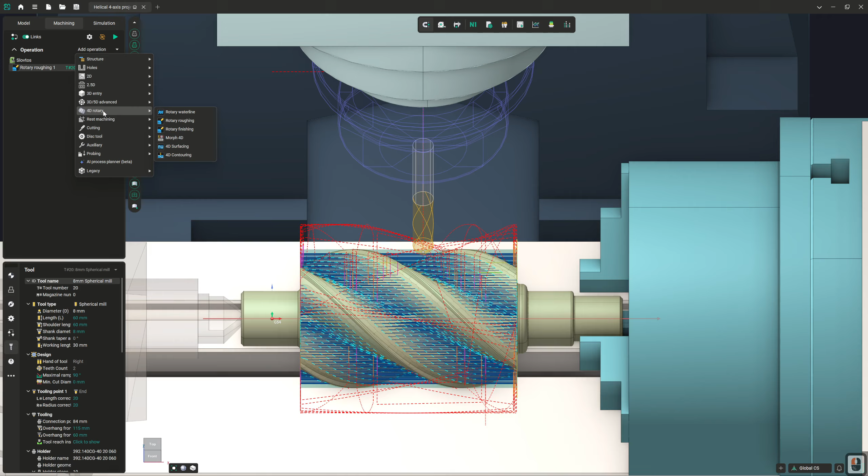So under add operation, under 4D rotary, let's take a look at 4D surfacing. And obviously the tool that we've got at the moment, as you can see from all of the tool marks from the roughing here, is a bit on the big side. So let's change that over now. And we're going to take a look at this 2mm spherical mill that's defined. And we can see here it's got a nice taper to it and everything, which serves our needs well.

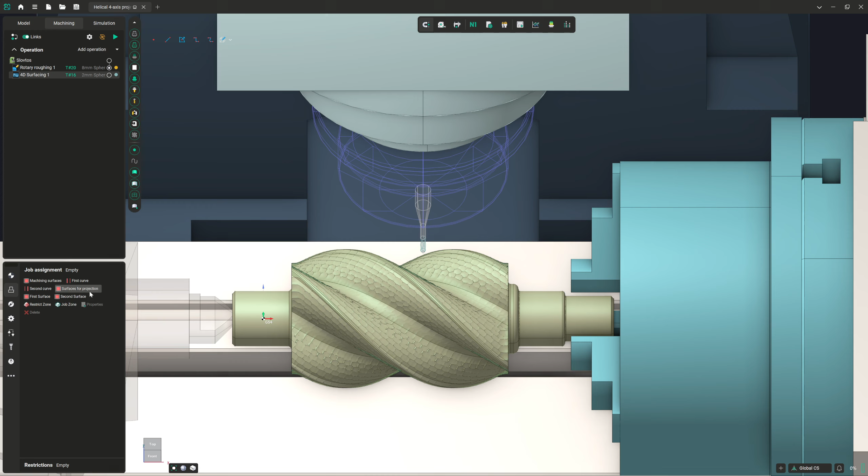And we need to define a couple of parameters for this operation. The first of which being, under job assignment, we want to define the first and then second curve and the machining surfaces. So starting with the curves, I'm going to grab the first curve, which we're going to go with the top of this vane here, and we'll set that as our first. And then for the second, we're going to go for the top of the next vane. So we're covering this entire surface in between them. Okay. So I'm going to set that now.

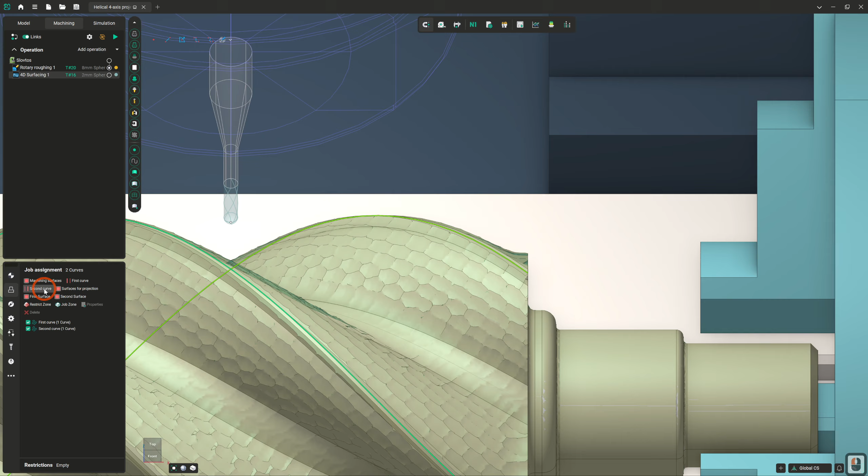And then finally, we're going to grab the surfaces like so. Let's get that last surface there. And we're going to define those as machining surfaces. Now, obviously that gives us 1/4 of this part quite readily selected and done. We can either select and grab each individual part, or we can go back into transformations as we have done in previous videos. So that's probably going to be our method. However, for now, I'd like to finish defining this.

So we'll take a look at the strategy tab now. And we've got a few options for the approach strategy. And parallel to vertical doesn't really match our needs. It's not quite the best direction for it. We've got some options here. So we can either go parallel to horizontal, parallel to vertical, parallel to 3D plane. Again, doesn't really suit this particular form very well. So I'm actually going to go for morph between two curves. And that is going to maintain the actual form of this curvature, but it's going to blend between the two.

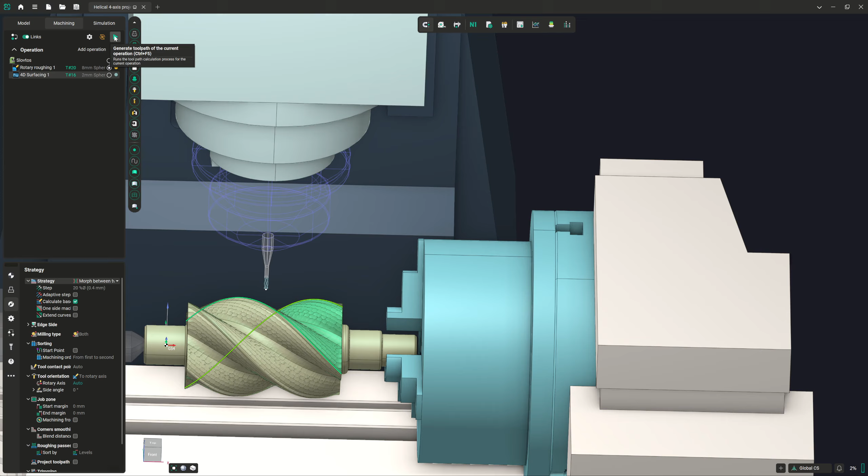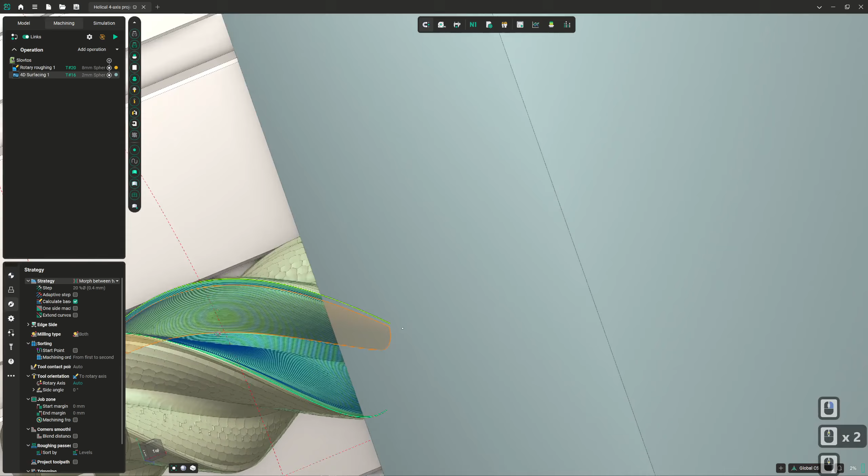However, since these curves are functionally rotations of each other with a slight offset, it means that it's going to maintain that same shape of sweep between each pass. So I'm going to click on Generate Toolpath now, and we'll be able to see, here we are, that same sweep gets repeated pretty much throughout. There's a little bit of modification as it reaches the end of these two curved surfaces. But generally, as I say, it stays pretty uniform throughout, which serves our needs rather nicely.

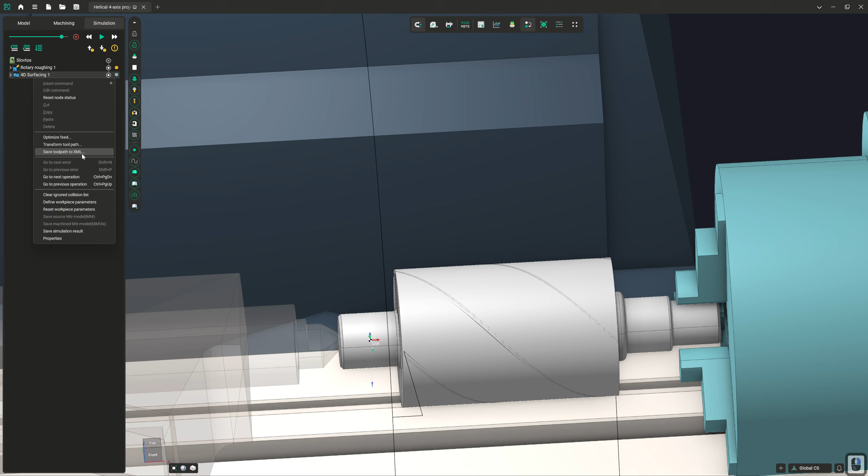So let's take a quick look at how this comes up in simulation, shall we? So we'll click on simulation now, and we are going to reset, and we're going to simulate up to current operation. Sorry, I managed to completely forget what I was doing there for a second. And we are going to run this, although a little bit slower than it was originally.

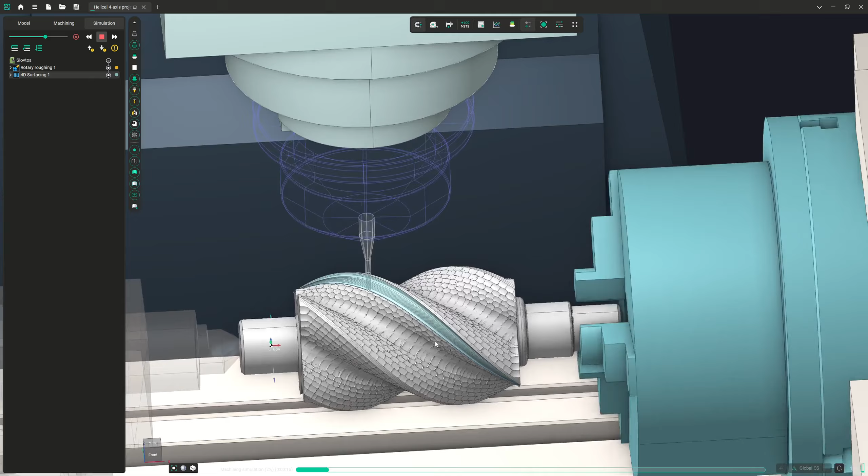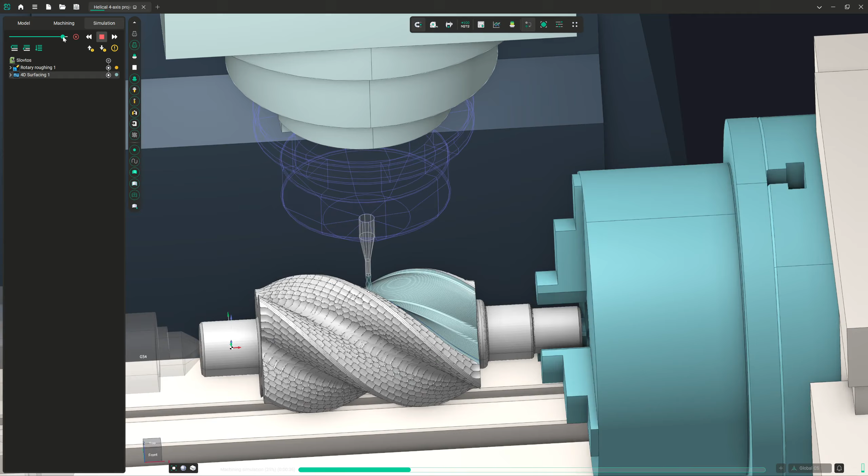And as we can see, this follows the helix of the part perfectly, which again gives us the best possible surface finish relative to the direction of motion in the part, and it's very much what we need this to do. So let's accelerate this a little bit, make sure it serves our purposes throughout the entire thing. We can watch it swing back and forth quite nicely there. Just going to speed past this a little bit. But as we can see, there's no nasty surprises. There's not even any particularly large bits that haven't been neatly machined away. So

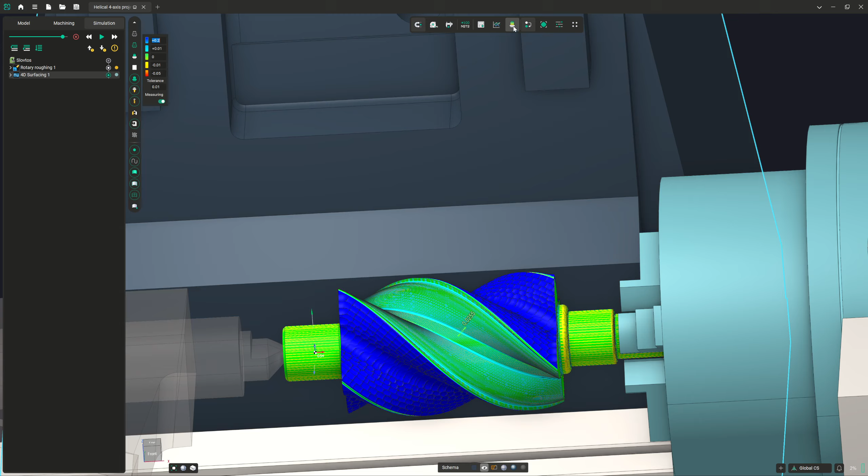let's have a quick look at verify compare. And as we can see, yeah, there's a tiny bit of light blue in there, but given that light blue is 10 microns difference, the obvious answer really would be to use a smaller tool or a tighter step over. But for the sake of this demonstration, I think it covers the purpose quite nicely. So I'm going to pull out the verify compare.

We're going to go back into machining, and I'm just going to snap the camera around again so it's a little bit neater. And we are going to take a look at copying this all the way around the part. So we're going to go to the Transformations tab. We're going to multiply the toolpath in the A-axis with a multiply step of 90, since that's degrees at this point, and a multiply count of 4. So now that we've done this, you can see you've got these ghost toolpaths forming that cover the entire part.

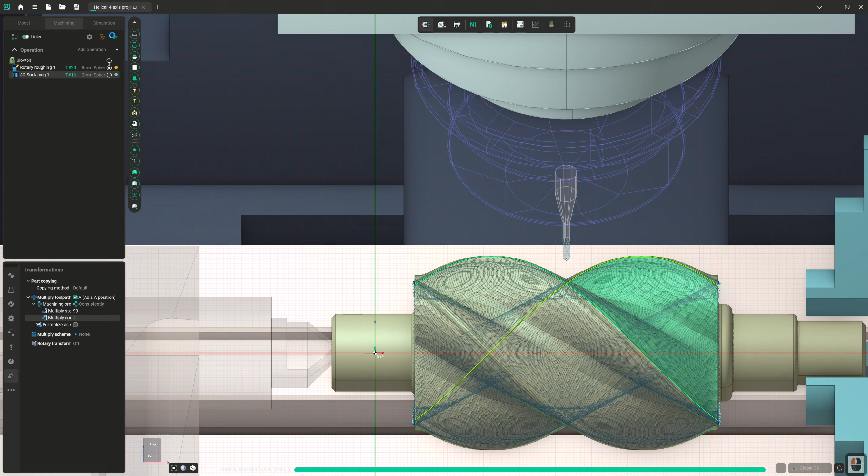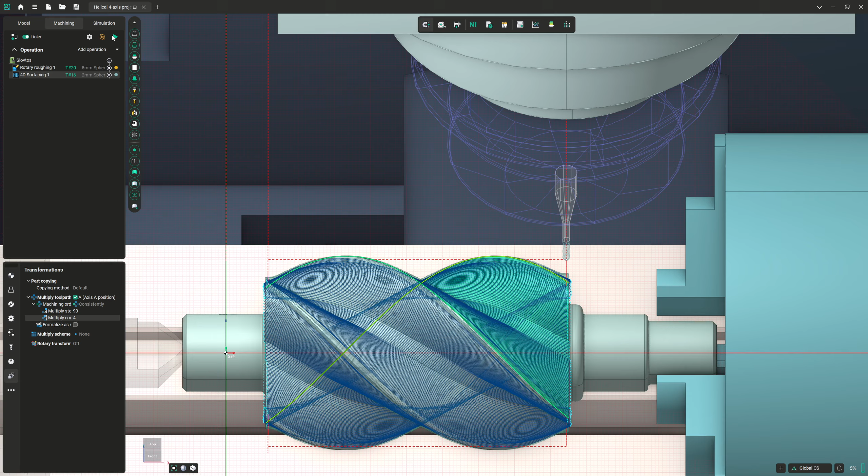I'm now going to generate the toolpath of the entire part, and we can see that it wraps all the way around. So for the sake of expedience, I won't bother simulating all of this because it's genuinely just going to be more of the same. But we now have 4 iterations of that same toolpath that we've just checked and proven to be good. So I'm going to see you in the next video where we deal with the final bit of finishing work on this by cleaning up the tips of the vanes on this part.